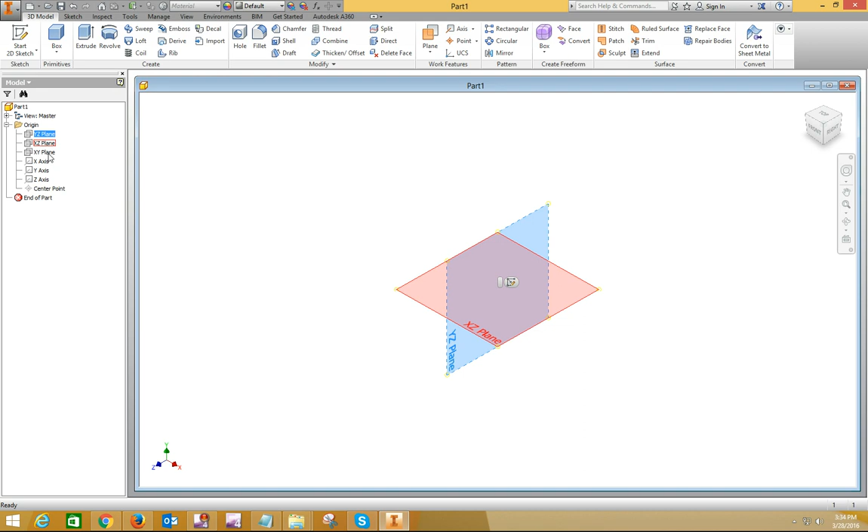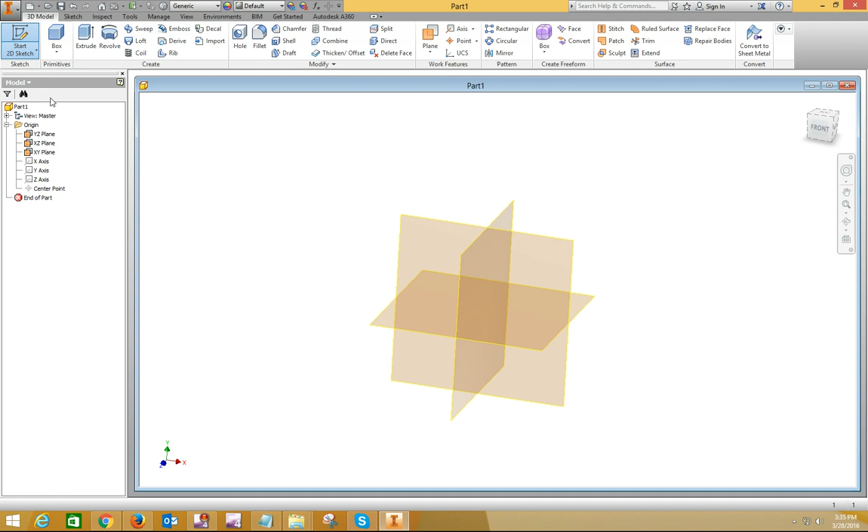But what we can do is turn on and off visibility of these here. I'm going to select all three of those and right click, and I can turn on the visibility of them so that they are on during my part. Sometimes this is helpful, sometimes it's not. You just have to play with it and see what you get used to. But sometimes it does come in handy. All right, so we want to start a sketch on the XZ plane right there. All right.

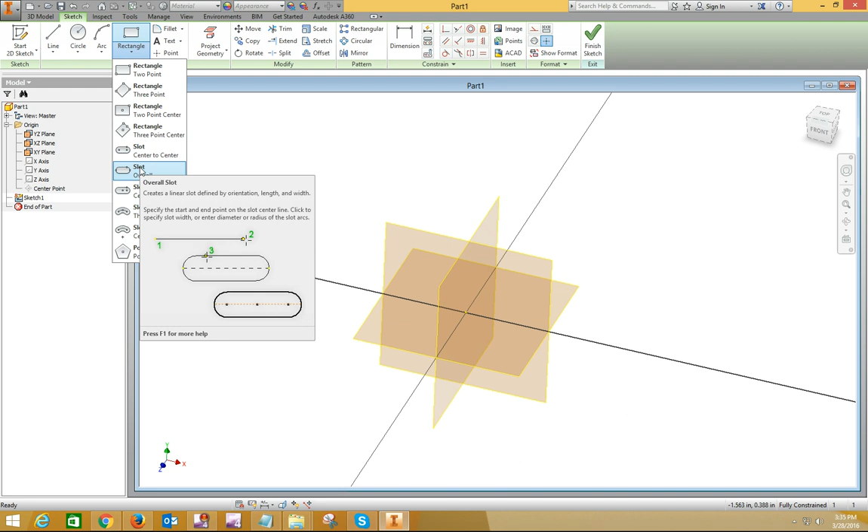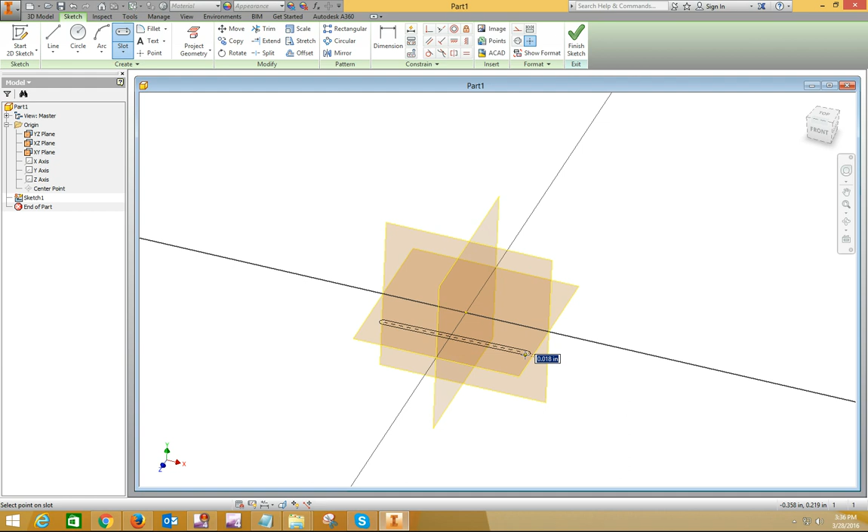Let me flip that up a little bit. On the rectangle pull down, I want to go slot. I want slot center to center. And then I'm going to come down here and drag this across. But I want it to be parallel to that axis, so we're looking for that symbol there. And I'm going to click once and drag out a radius there. Sizes aren't important right now. Okay, so that gave me my slot. I'm going to use it to create my part.

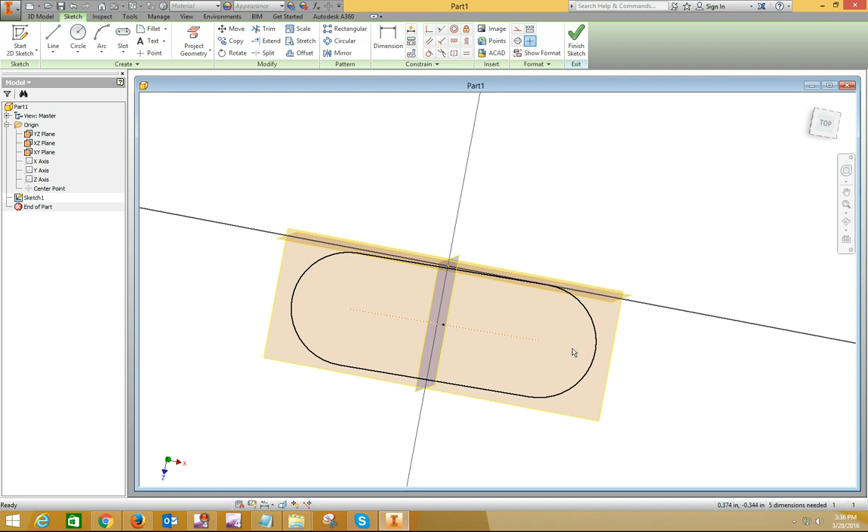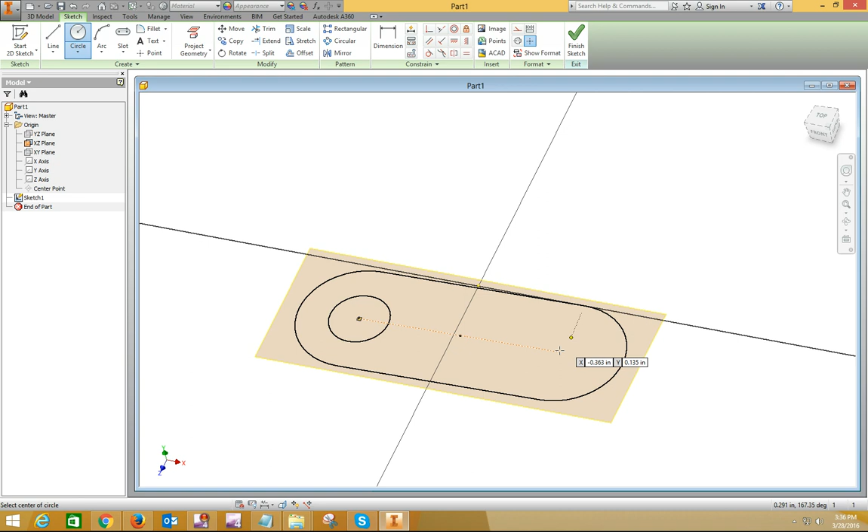And then I want to put a couple of circles in there. Well, it turns out it didn't constrain that. We'll fix that. All right, let's turn off these. They're a little confusing. So let's put a couple of circles, and I want to go concentric, so I'm looking for that green snap. Okay, so I've got those, but now I need to fix this. So let's do a constraint on that. First of all, we'll project geometry of the x-axis and go with my center line, which is a construction line, and we'll make those parallel.

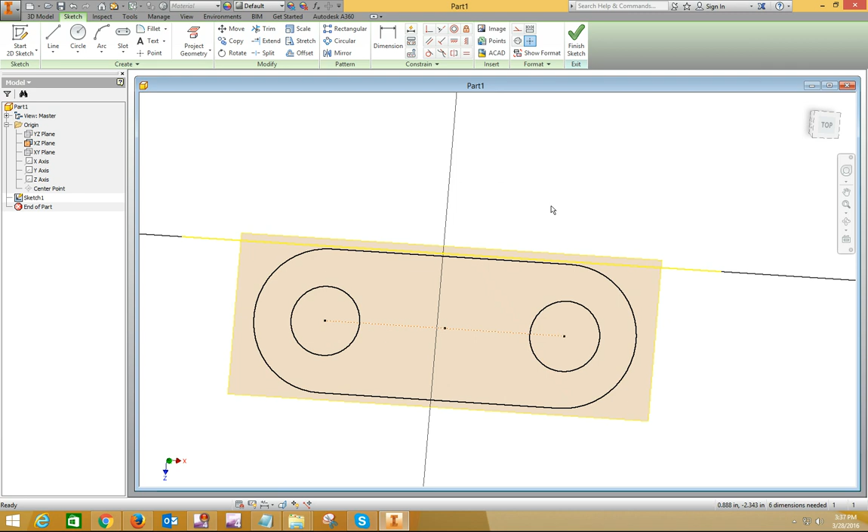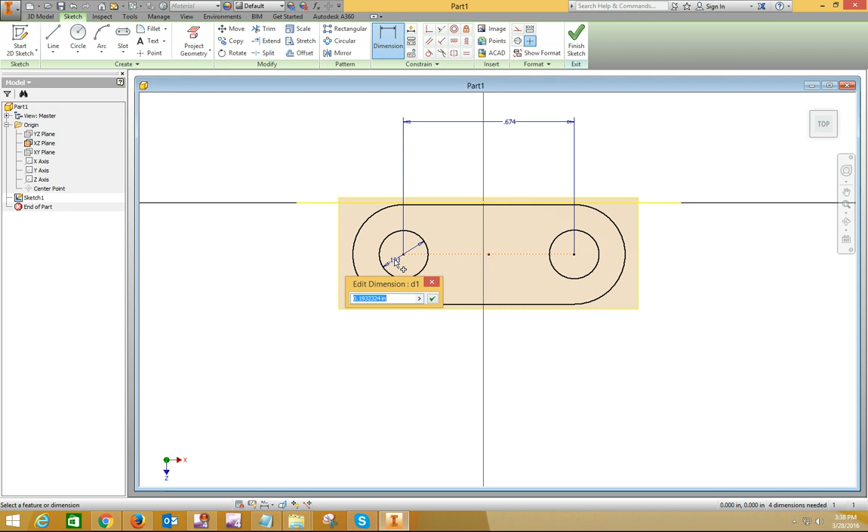Okay, now we want to apply some dimensions, and I need you to apply these dimensions in the same order in which I am doing them, and we'll show you why shortly. My first dimension is going to be the length of the slot. So I'm going to go from this arc to this arc. So that's dimension number one. And I'm not going to worry about sizing them at this minute. Dimension number two is going to be diameter of this circle. Dimension number three is going to be radius of the arc.

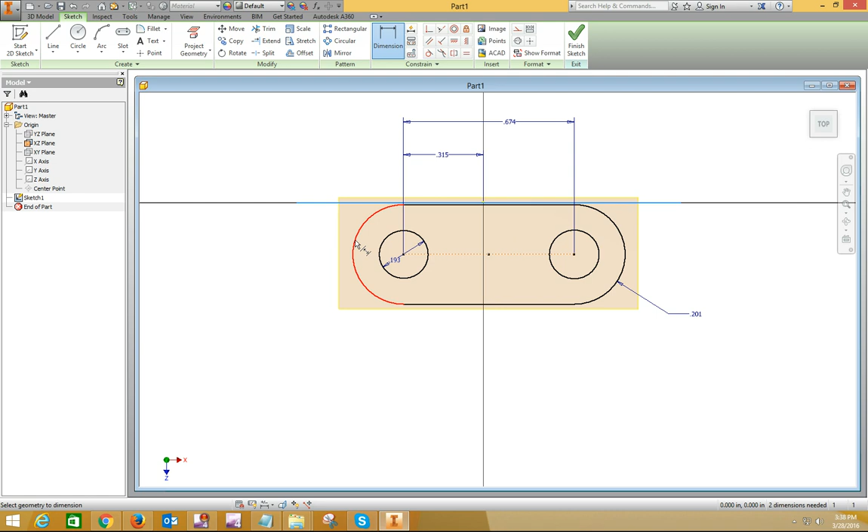Dimension number four is going to be from arc to origin, right there, my 0 point. Dimension number five is going to be from the axis to the center. And then dimension number six will be this circle down here. Okay, so I've got those created. Now I want to come back in and apply my sizes that I really want. And usually when you start dealing with these kinds of things in Inventor, you want to apply the largest ones first.

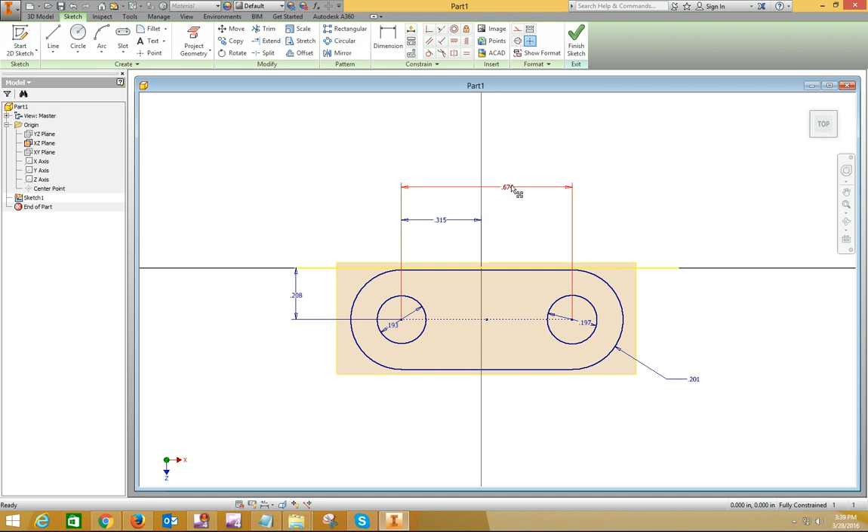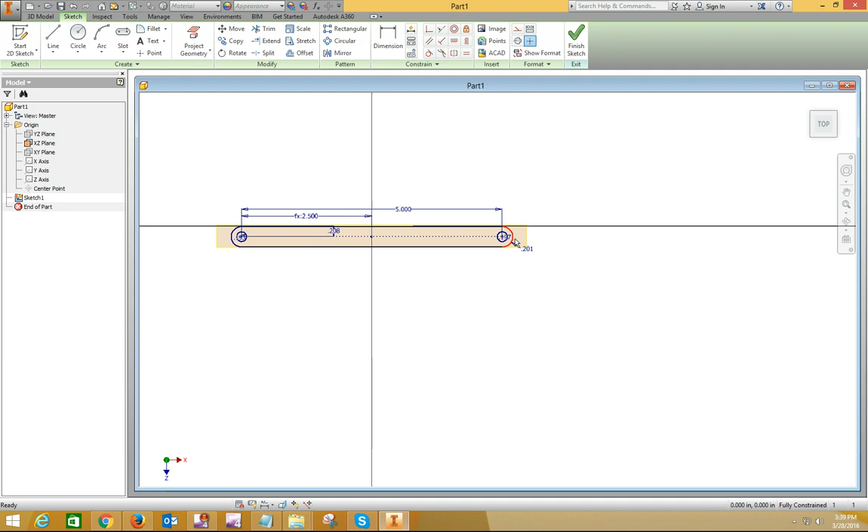So I want to double click that. I want to edit that one. I want to make it 5 inches long. Boom, really big. All right, this one, we're going to do a little trick, and I'm going to choose that dimension divided by 2. And that centered it up on the origin across there. Okay, now the arc out here, I'm going to have to zoom in on that. There we go. I want that to be a radius of 1. See how that fixed that up.

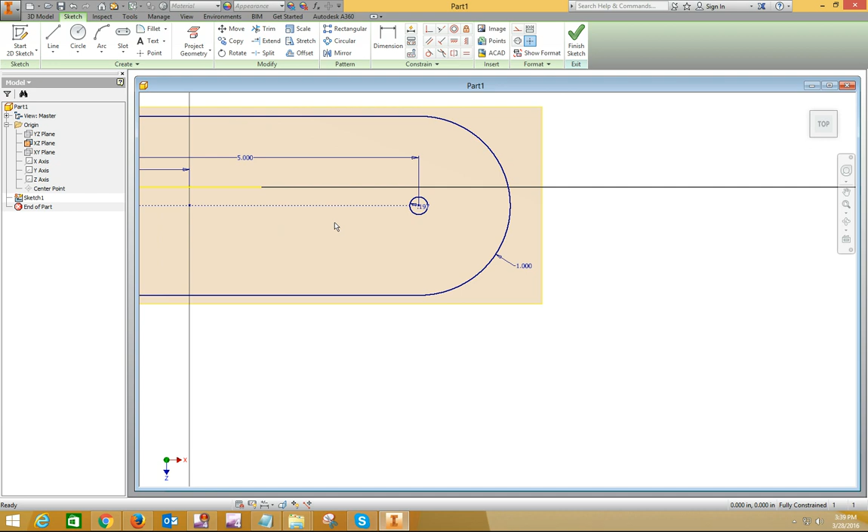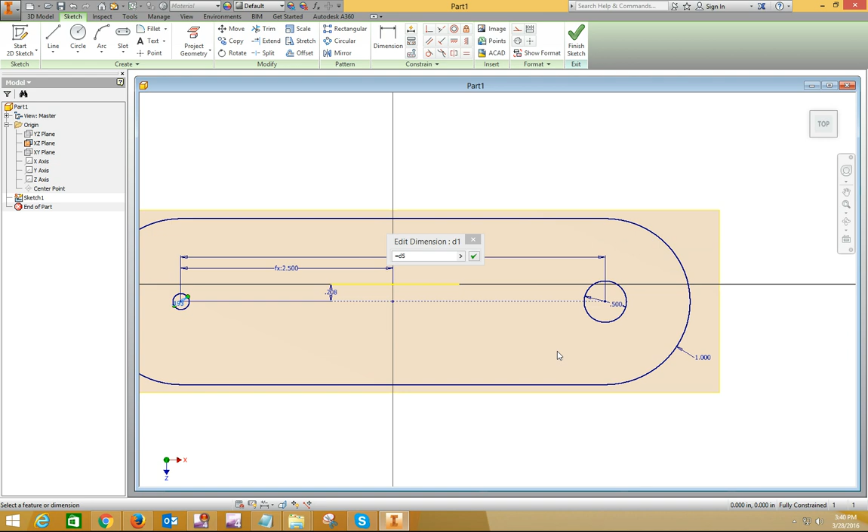And we can take this one and make it a diameter of 0.5. And I can take this one and I'm going to say equals that one. Come on. So that makes them equal. And you see it puts a function there because it's got that mathematical function in it. Now this one here, let's drag it to the outside. And we're going to make it 0. Okay.

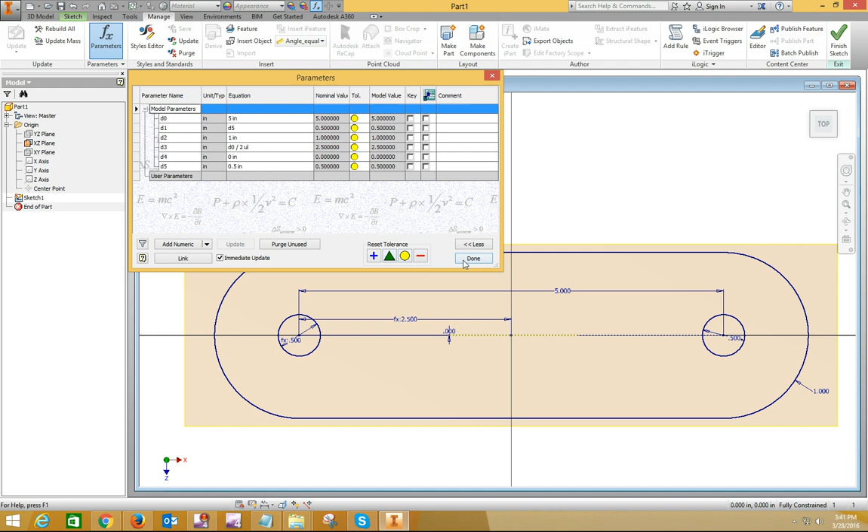Let's see, Manage tab, update. Let's update that. Okay, on the Manage tab, we want to look at parameters. There we go. And you can see here's the order in which we applied the dimensions. And if there's an equation, remember some of them we put in dimensions, like this one here, D3. We said dimension 0 divided by 2 units. And in here we did an equals D1, which was equal to D5. Okay, so this is how parameters work. You can look at some of these things. And we'll stop here and go to the next video.